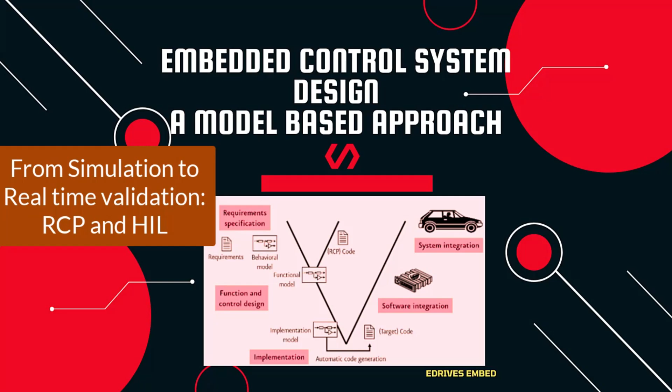Historically, computer simulation techniques went through the following stages of development. In the 1940s, analog simulation was the major way of simulation. Digital simulation began in the 1950s, and in the 1960s, the first simulation languages and packages began to emerge. In the 1980s, the development of object-oriented simulation techniques was the leading trend.

With the popularity and wide availability of digital computers in the past 30 years, a great many professional computer simulation languages and tools have appeared, such as CSMP, ACSL, SIMNON, MATLAB and Simulink, Matrix X, System Build, and CSMP-C.

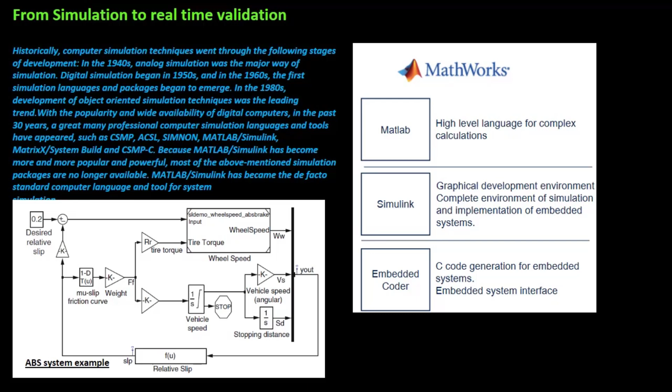Because MATLAB and Simulink have become more and more popular and powerful, most of the above-mentioned simulation packages are no longer available. MATLAB and Simulink have become the de facto standard computer language and tool for system simulation.

Model-based design is a mathematical and visual method that facilitates the complex design of embedded systems. Instead of using extensive and complicated programming codes, designers can use MBD to define models with advanced functional features using continuous time and discrete time simulations. The main components of a model-based design are system-level and component-level design and simulation, automatic code generation, continuous testing and verification.

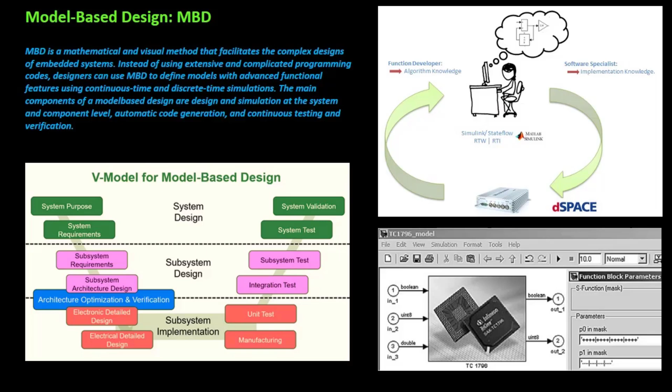In the past, running the system in simulation or running it in hardware were the only practical alternatives for many engineers seeking to deploy their control systems. In recent years, two alternatives have become common: rapid control prototyping, also called RCP, and hardware in the loop, or HIL. In RCP, the control laws are designed in a simulation environment and executed on real-time hardware, driving a physical power converter and plant, and reading physical feedback sensors.

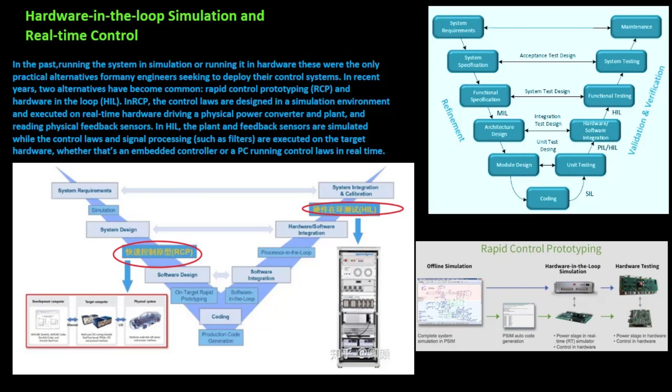In HIL, the plant and feedback sensors are simulated, while the control laws and signal processing, such as filters, are executed on the target hardware, whether that is an embedded controller or a PC running control laws in real time.

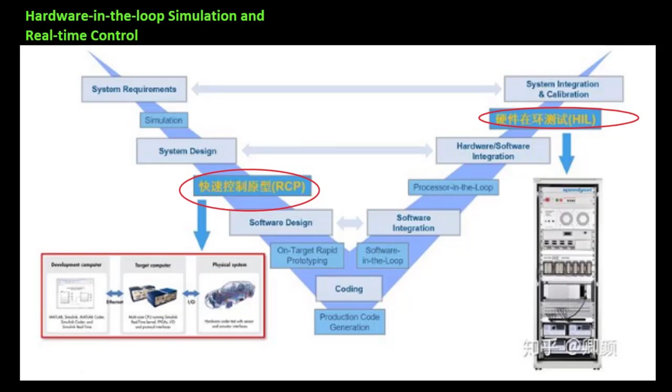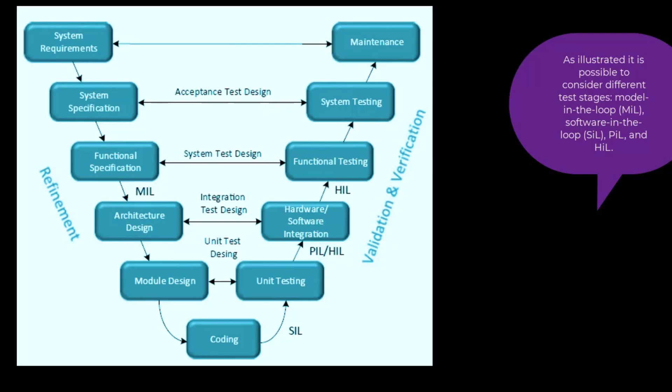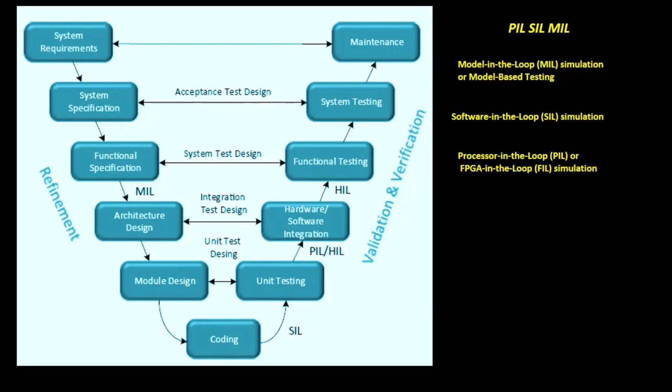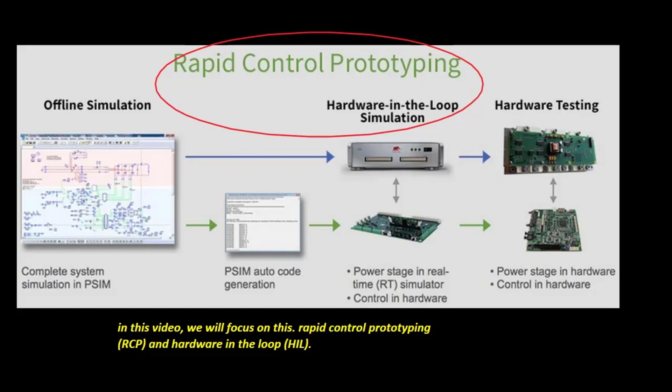The MBD begins with the MIL scenario, which consists of developing models submitted to simulated test environments at the beginning of the design. The models are then refined and transformed into software. This software can be tested in the SIL scenario or in the processor in the loop scenario. Finally, the HIL scenario contains the real hardware and software integrated into a simulated environment.

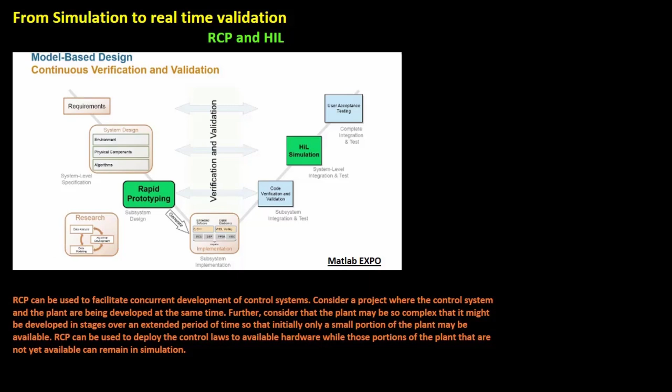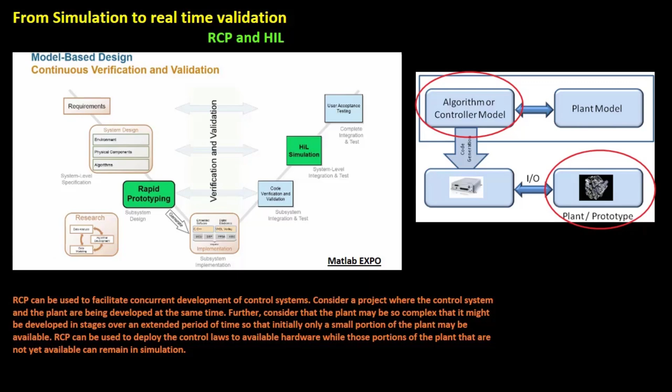RCP can be used to facilitate concurrent development of control systems. Consider a project where the control system and the plant are being developed at the same time. Further, consider that the plant may be so complex that it might be developed in stages over an extended period of time, so that initially only a small portion of the plant may be available. RCP can be used to deploy the control laws to available hardware, while those portions of the plant that are not yet available can remain in simulation.

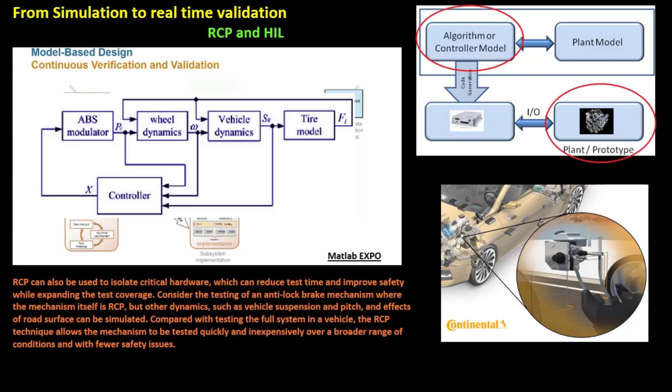RCP can also be used to isolate critical hardware, which can reduce test time, improve safety, and expand the test coverage. Consider the testing of an anti-lock brake mechanism, where the mechanism itself is RCP, but other dynamics, such as vehicle suspension, pitch, and the effects of the road surface, can be simulated. Compared with testing the full system in a vehicle, the RCP technique allows the mechanism to be tested quickly and inexpensively over a broader range of conditions and with fewer safety issues.

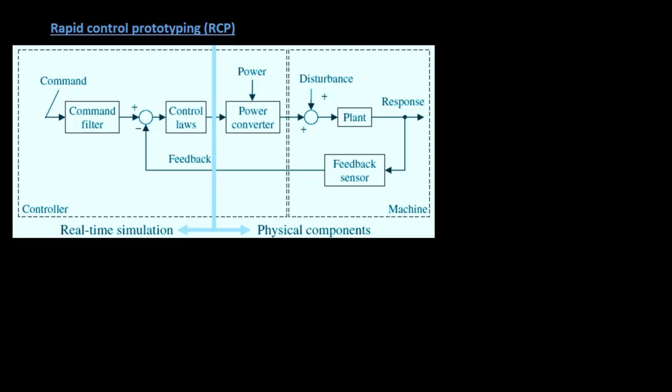Since the control laws are operating on the actual plant, the possibility that inaccurate models are corrupting the results is removed. RCP allows a three-step process of migration. First, full simulation at the start of development. Designers typically simulate the entire system.

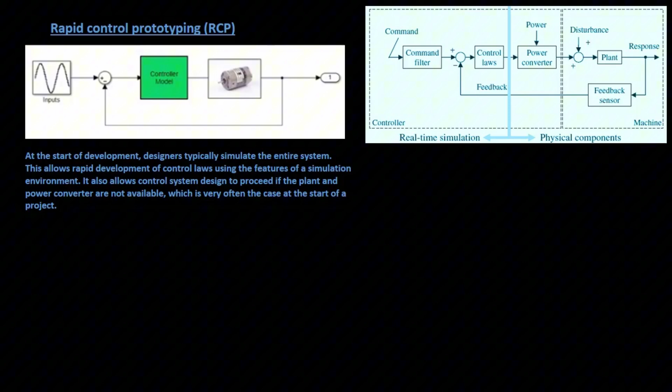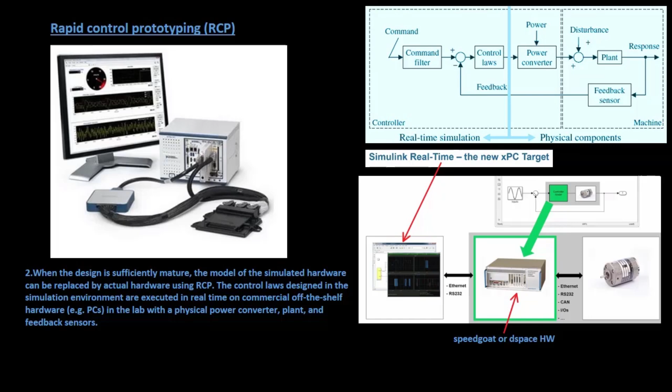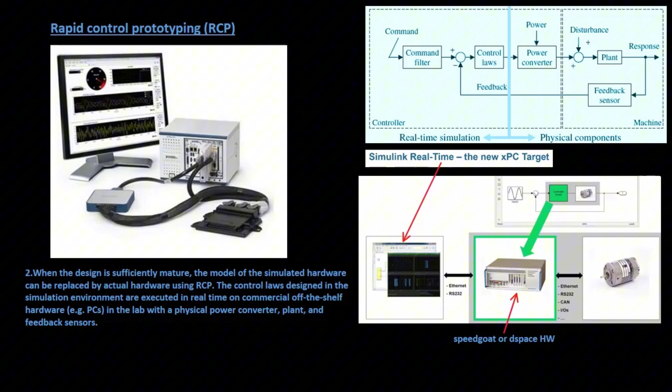Second, when the design is sufficiently mature, the model of the simulated hardware can be replaced by actual hardware using RCP. The control laws designed in the simulation environment are executed in real time on commercial off-the-shelf hardware, for example, PCs in the lab with a physical power converter, plant, and feedback sensors.

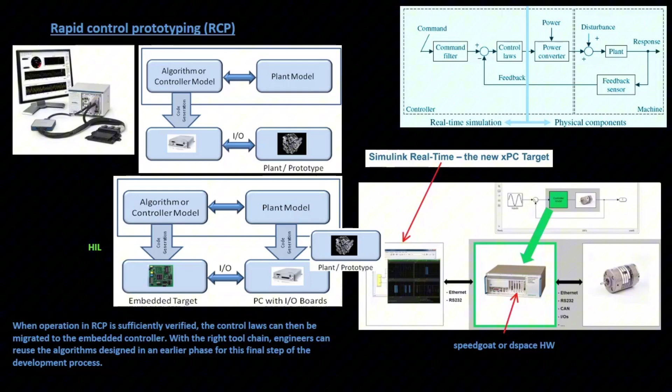Third, when operation in RCP is sufficiently verified, the control laws can then be migrated to the embedded controller with the right toolchain. Engineers can reuse the algorithms designed in an earlier phase for this final step of the development process.

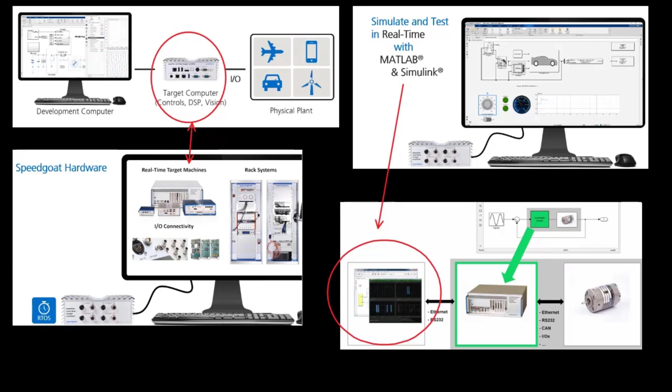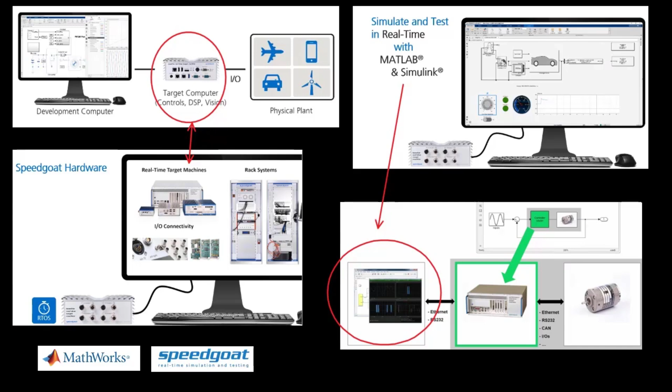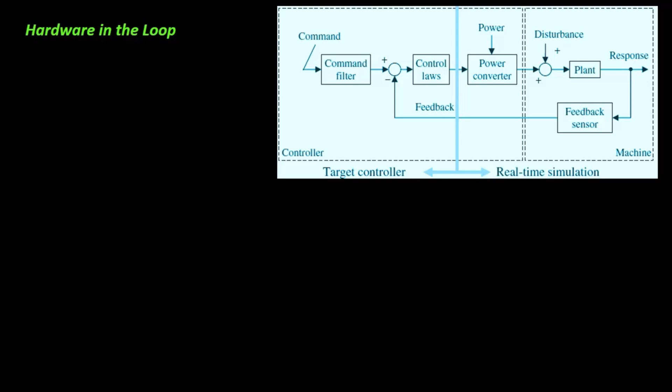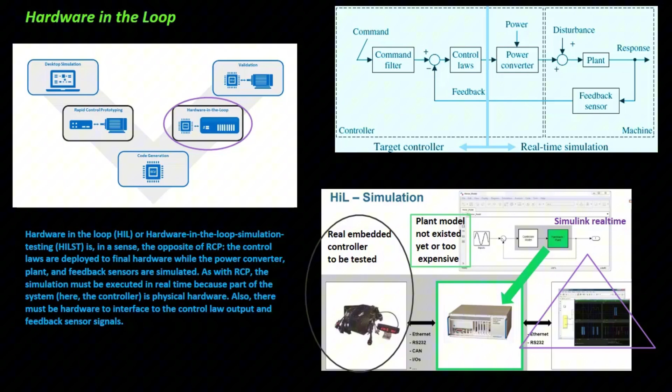Hardware in the loop, or HIL, is in a sense the opposite of RCP. The control laws are deployed to final hardware, while the power converter, plant, and feedback sensors are simulated. As with RCP, the simulation must be executed in real time, because part of the system here, the controller, is physical hardware. Also, there must be hardware to interface to the control law, output, and feedback sensor signals.

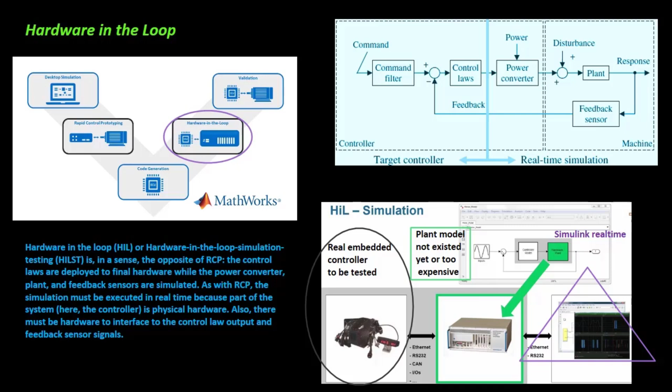The HIL scenario tends to become the standard electronic development tool for testing ECUs, MCUs, and particularly their software for different OEMs. HIL has been used for years in industries such as aerospace and automotive, where plants are especially complex. HIL can augment testing of physical plants to provide many advantages.

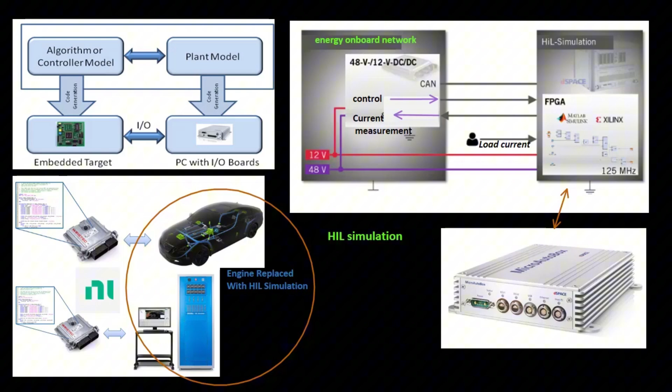This video is just an introduction to real-time simulation, RCP and HIL. Over time, we will present many more systems and applications.